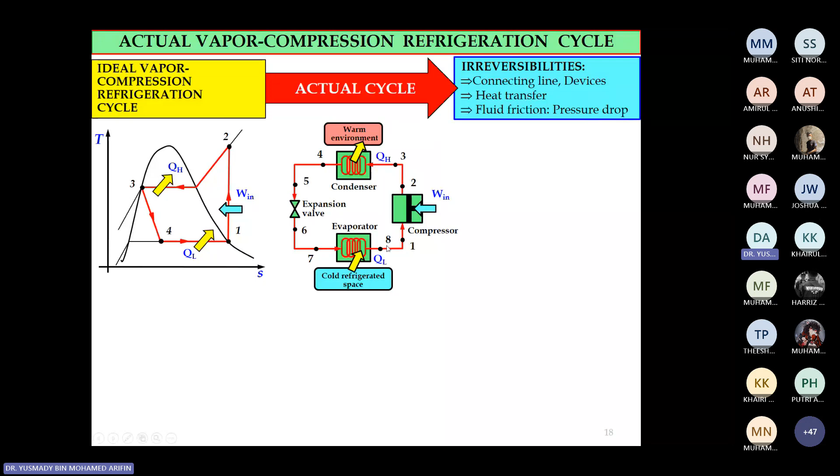So instead of only having 4 states involved in the TS diagram, for this case you will have more. For this schematic diagram, you need to consider states 1, 2, 3 until 8, where each individual connecting tube or piping line will have 2 different states. Previously, for the same piping line you only have 1 state.

For example, state number 1 for the ideal case is the inlet of the compressor, same as the outlet of the evaporator. But now we need to treat it differently. We need to use different states for the inlet of the compressor and also the outlet of the evaporator, as shown in the schematic diagram.

So for the same piping line or tubing line, we have 2 different states because we consider the pressure drop and also the temperature drop. That's why we have 2 states for the same piping line, as shown in this schematic diagram. Still, we have 4 main components: compressor, condenser, expansion valve, and also the evaporator.

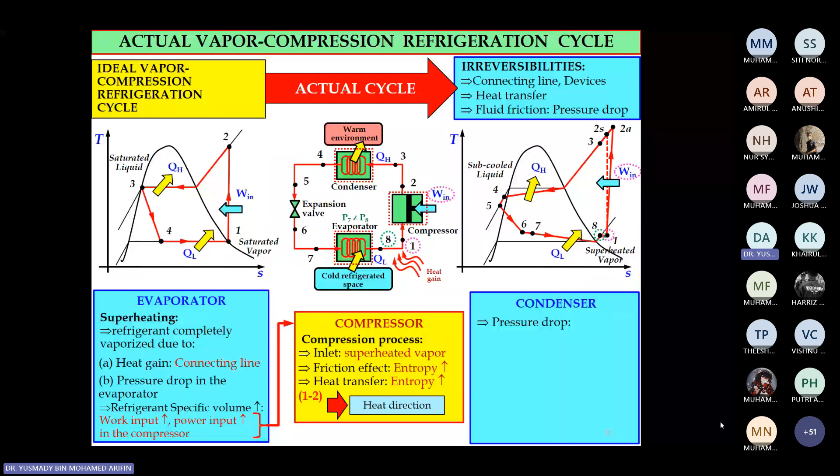In the condenser, what happens? We have pressure drop in the piping line in the condenser, in the connecting line between the compressor and the condenser, and also between the condenser and the expansion valve. So the outlet of the condenser is hard to maintain as saturated liquid as in the ideal cycle. That's why the condition in terms of phase at the outlet of the condenser will be compressed liquid or subcooled liquid before entering the throttling device or expansion valve. So these are the reasons why the phase and formula change if you compare the actual vapor compression refrigeration cycle to the ideal one.

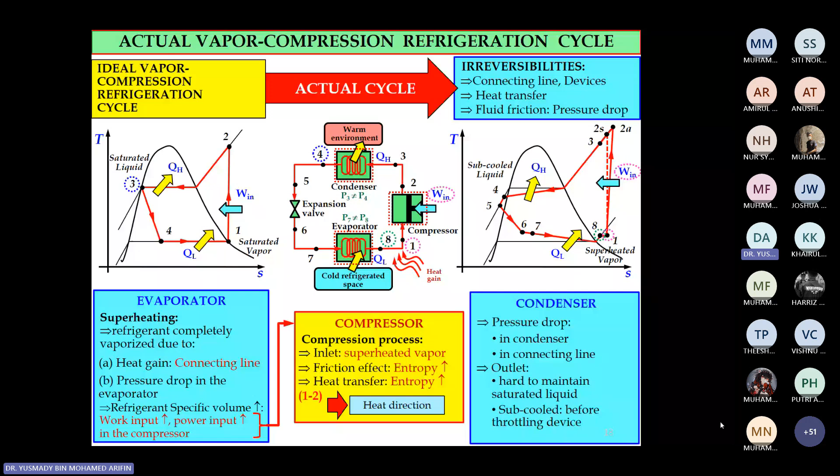So in terms of analysis, in order to obtain the actual equations, you need to analyze by using the energy balance equation for each individual component: compressor, condenser, expansion valve, and evaporator. Based on the numbering used in the schematic diagram and TS diagram, we will get new specific formulas for Q in, QL, QH, and W in.

So for this case, based on this numbering, your QL will be H8 minus H7, your QH will be H3 minus H4. If we have more than one state for the same piping line, make sure you choose the closest inlet and closest outlet for the particular device of the refrigerator.

W in equals H2A minus H1 because now we consider the actual cycle. H2S is just for reference, to determine H2A later on. For the throttling process, H5 equals H6 because the numbering at the inlet of the expansion valve is 5, and the outlet is H6.

COPR uses the same equation, but now we have an additional parameter for the performance of the compressor, which is the isentropic efficiency for the compressor: W in S, which is H2S minus H1, divided by W in A, which is H2A minus H1.

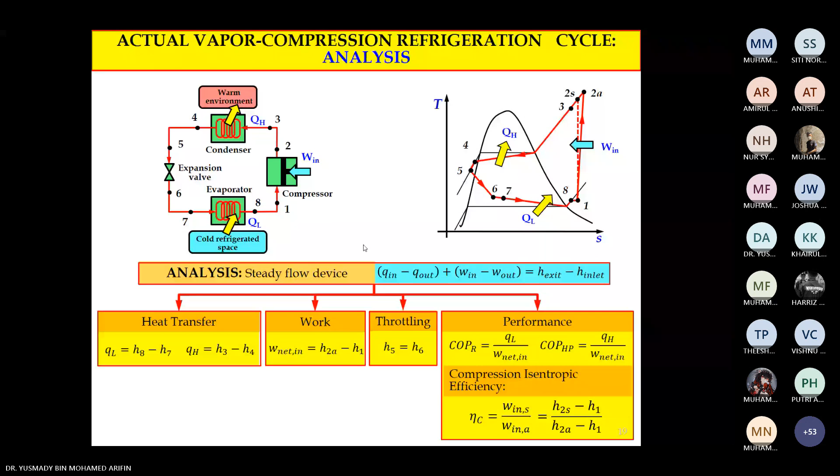Okay, let's look at examples. Close your solution. We will try to solve the problem together by looking at the thermodynamic table for R134A. Try to draw the schematic diagram and TS diagram without looking at the solution.

So if you read the question, it mentions refrigerant 134A, which means when the substance or type of refrigerant is mentioned in the question, you need to refer to the particular table in order to solve the problem. So for this case, you need to refer to the R134A table.

Entering the compressor, the condition at the inlet is superheated vapor. So the phase of this refrigerant at the inlet of the compressor is already mentioned as superheated vapor at a pressure of 0.14 megapascal, with temperature given at -10 degrees Celsius, and mass flow rate 0.06 kilogram per second. So this is the condition at the inlet of the compressor.

And it leaves at 0.8 megapascal and 50 degrees Celsius, so this is the condition at the outlet of the compressor. The refrigerant is cooled in the condenser to 26 degrees Celsius and 0.72 megapascal, so this is the temperature and pressure at the outlet of the condenser.

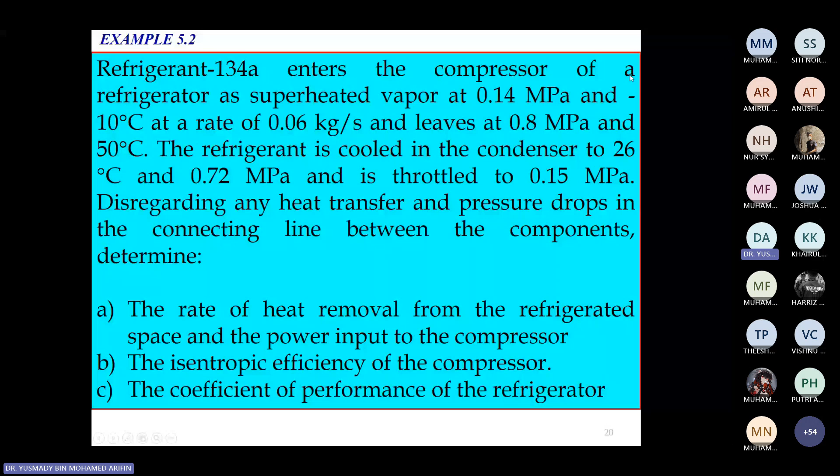4? Okay, 4. 0.14 megapascal, 0.8, 0.15, 0.72. Okay, now let's try to solve together the problem involved.

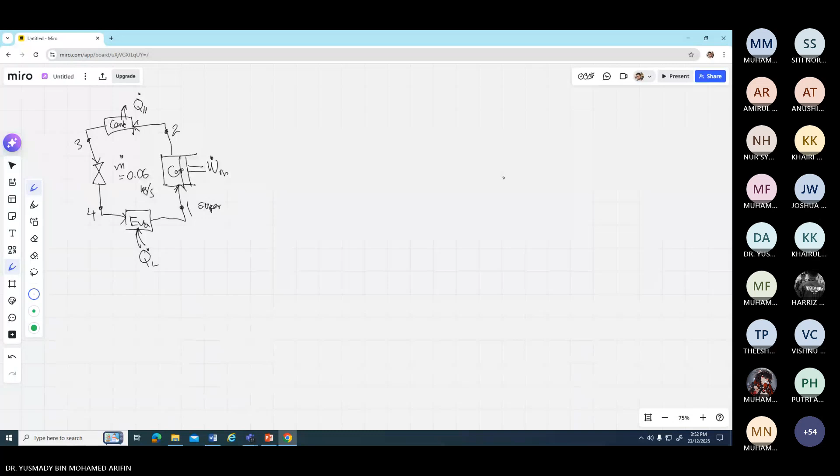Okay, so now state whatever data given in the question. At the inlet of the compressor, the phase is superheated - 0.14, superheated vapor in terms of phase. Pressure P1 equals 0.14 megapascal, T1 negative 10 degrees Celsius.

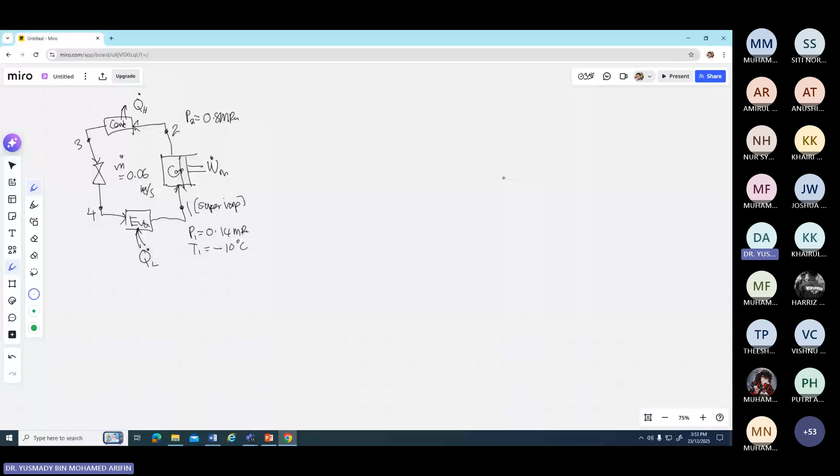Coming out from the compressor, P2 equal to 0.8 megapascal. T2 is 50 degrees Celsius.

And then coming out from the condenser, P3 equals 0.72 megapascal. Temperature? Not given, okay, not given. What else after that?

After the throttling process, the pressure dropped to 0.15 megapascal. Okay, you already completed the schematic diagram. So now draw the TS diagram, draw the axis.

After the condenser there's a temperature. What is the temperature? 26 degrees Celsius - not negative, positive 26 degrees Celsius.

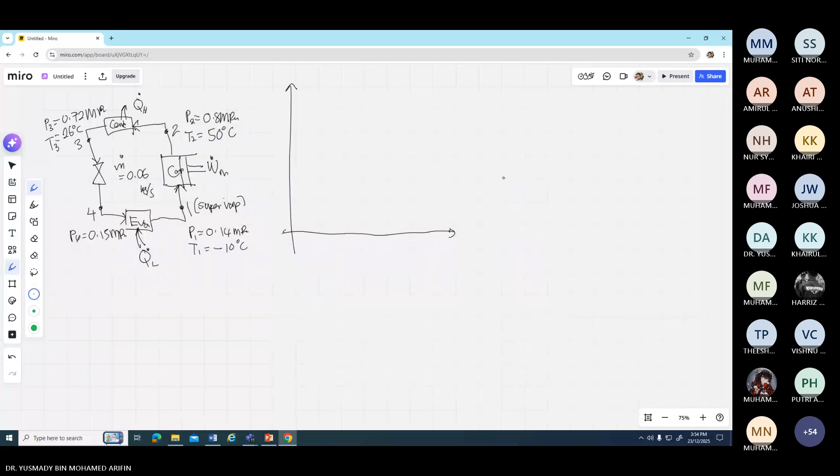Draw the saturation line. So now you need to consider 4 constant pressure lines: 2 constant pressure lines at the upper part at the condenser, 2 constant pressure lines at the lower part for the evaporator. So you just draw them.

Roughly: 0.8 megapascal, 0.72 megapascal at the upper part, 0.15 megapascal, 0.14 megapascal at the lower part for the evaporator. Make sure the higher temperature line location is at the upper side, lower temperature pressure line at the lower part. So 0.8 highest, then 0.72, 0.15, 0.14.

Okay, inlet of the compressor, state number 1, superheated vapor, pressure 0.14. So the point will be on the constant pressure line of 0.14. Try to find what is the saturated temperature for 0.14 megapascal.

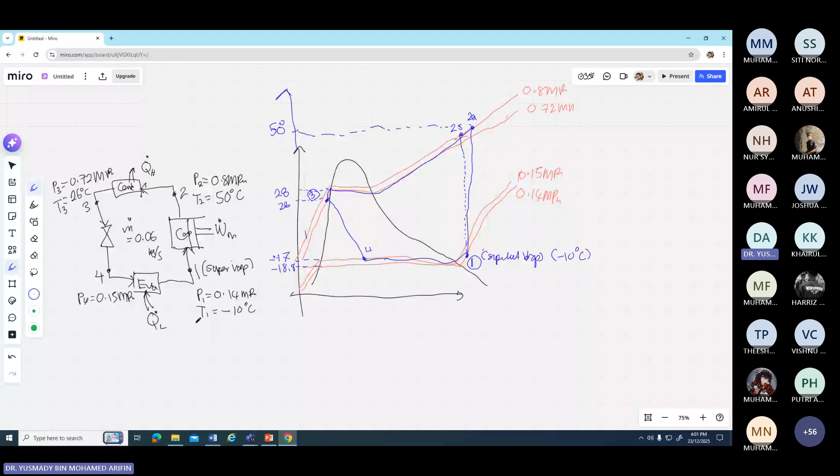So next, determine H1, H2A, H2S, H3, H4. Correct?

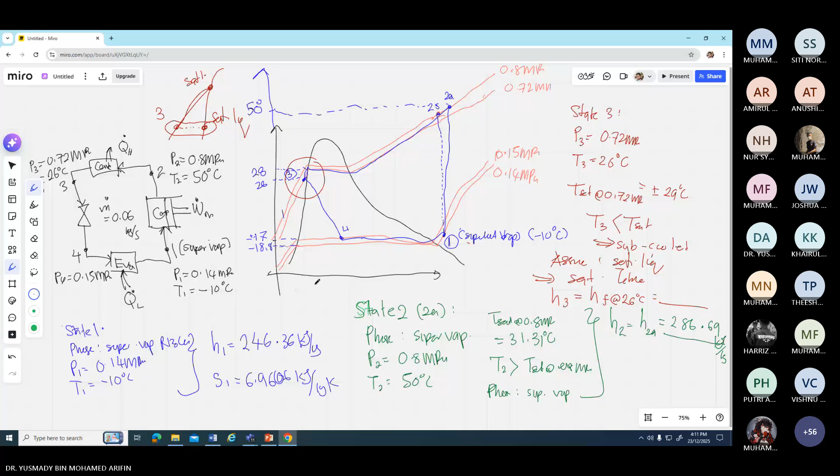85.75. Yep, what's the value? HF at 26, at temperature.

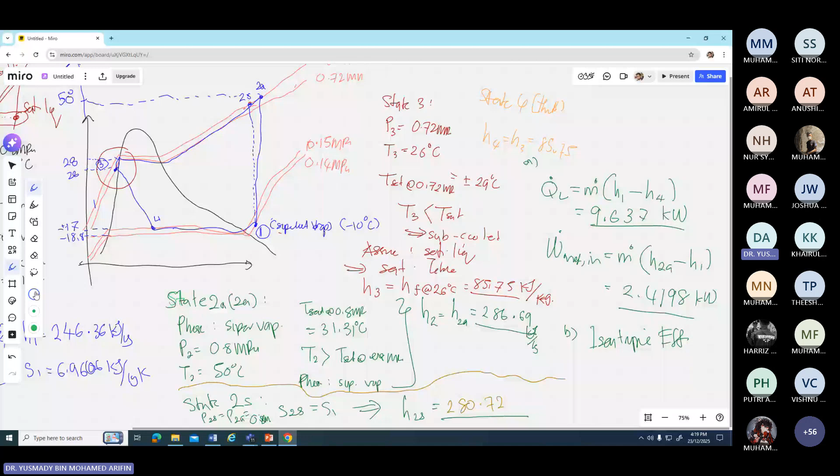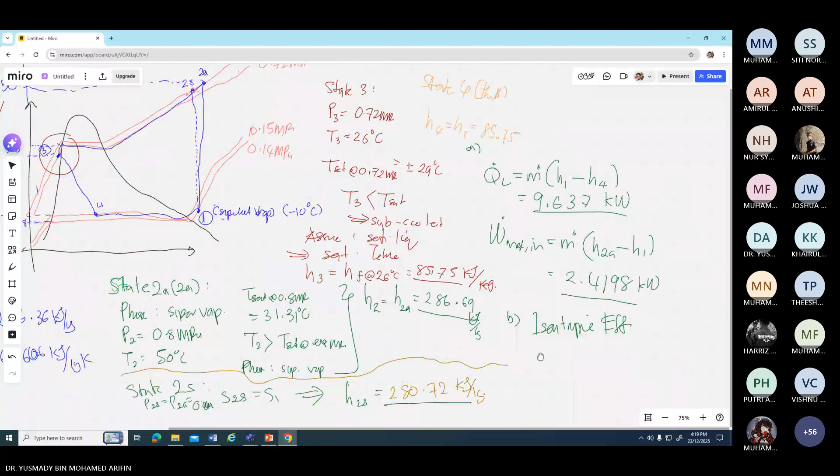Thermal efficiency. WE. Okay, so isentropic efficiency of the compressor. So this question asks you the performance of individual compressor that we call isentropic efficiency of the compressor, which means in terms of symbol it's eta C lah. W in A bagi W in S, W in yang paling, W in S divide by W in A. Betul.

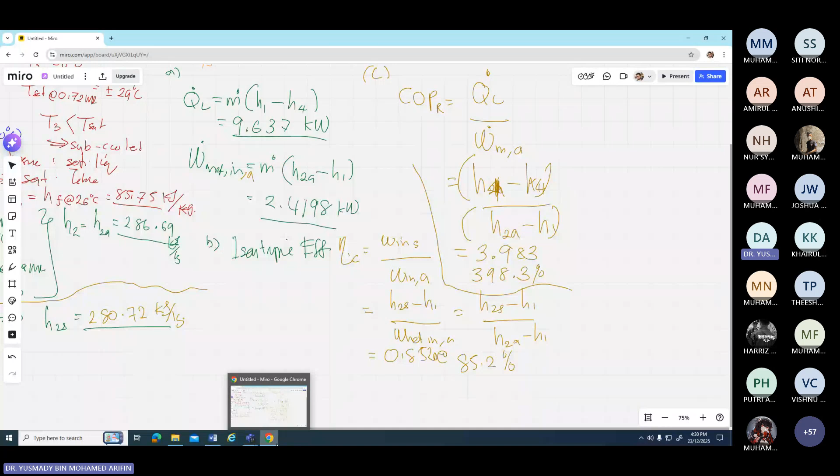Pukul 6 tapi 4:30 dah habis. Mana lagak kamu ni? Betul lagak. Okay, boleh. Tak ada soalan No other question? Tak ada, okay.

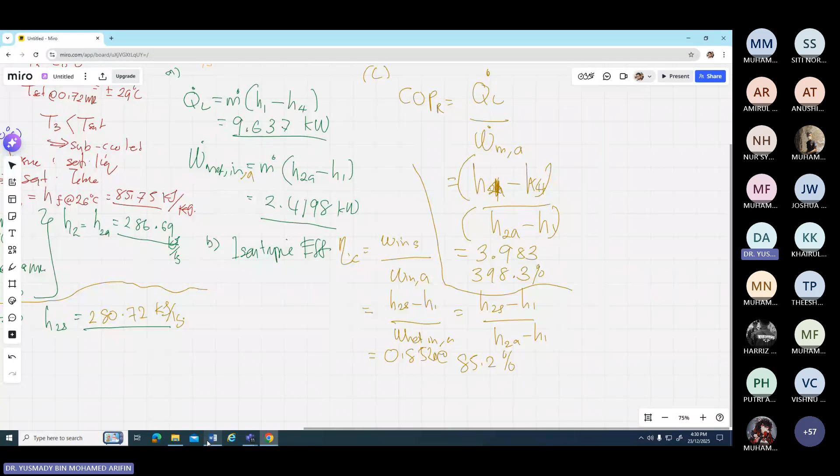No cry. No woman no cry. No cry. Bahaya patut. Doktor memang ada sengkang tu Doktor minat lagu ni saya rasa. Doktor yang ada sengkang tu kena letak sekali Dash sekali Kena letak dash sekali.